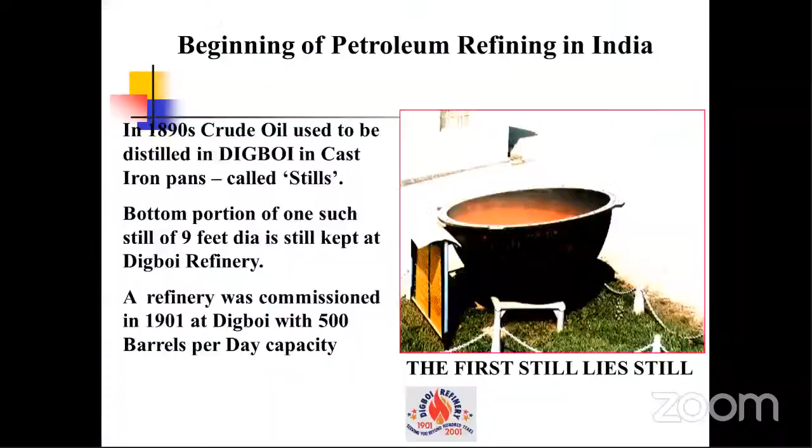Earlier in the 1890s, only separation processes were used, like the still you have seen kept in front of the Digboi refinery. Later on, conversion processes were added, and to meet environmental requirements, several finishing processes have been added subsequently. So this is the process of how hydrocarbon molecules in crude, which do not meet customer requirements, can be converted into marketable products.

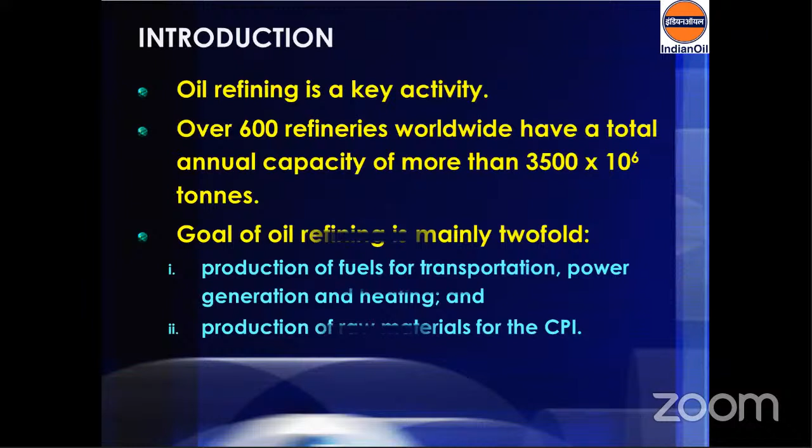Coming to the primary processes, the first step is desalting. After receiving crude in the tank, we normally give a settling time of 24 hours to settle down the water part. Then we drain the water, or if we do not drain the water, we send the crude to the desalter. After desalting, the water is separated from the crude, and the crude portion, containing minimum water, is fed to the distillation columns.

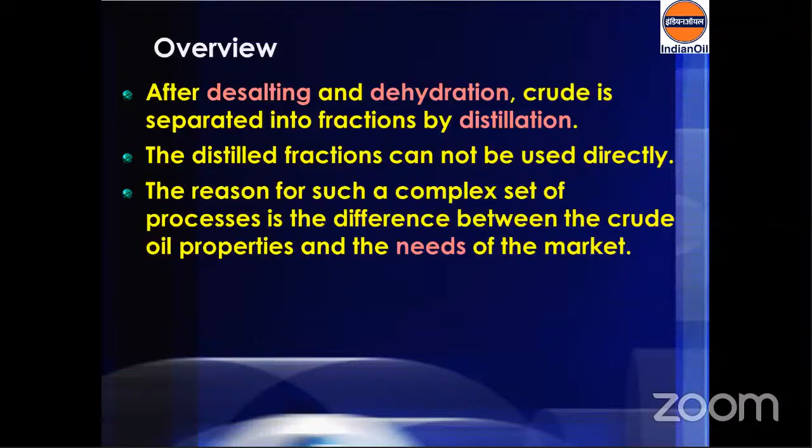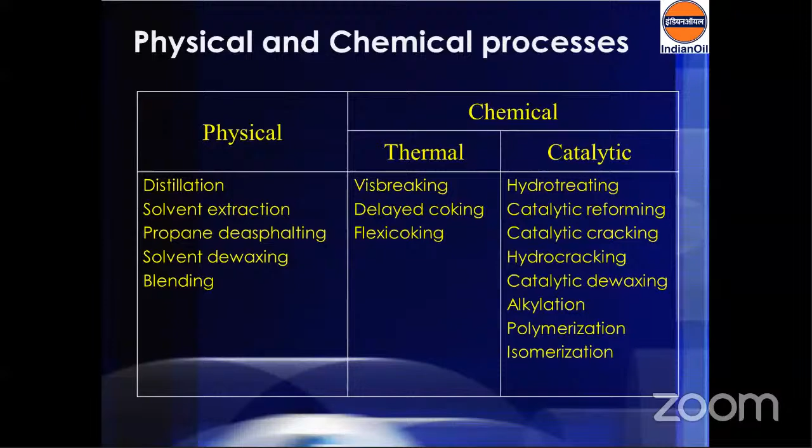Crude oil often contains water, inorganic salts, suspended solids, and water soluble trace metals. If this water is put into primary processes without segregating, it will lead to different problems. In the secondary processes, it will lead to corrosion, plugging, fouling of equipment, etc. So the method of crude desalting is important before putting the dewatered crude into the topping column or pre-fractionator - I will come to the pre-fractionator part later.

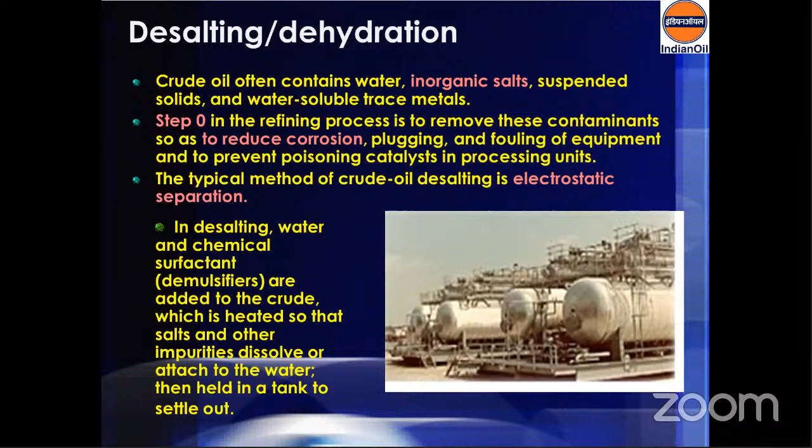What happens in desalting is basically adding surfactant materials or demulsifiers into the vessel, called the desalter, and putting some electric current into that system. By this way, water gets separated, and from the boot of the desalter, we drain out the water, which goes to the effluent treatment plant. The dewatered crude, free from water and some contaminants, is then fed into the PF column or pre-fractionator column.

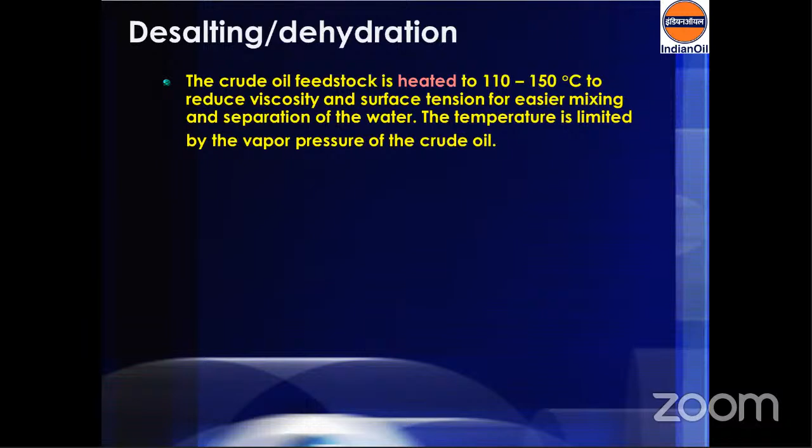Before putting that crude into the pre-fractionator column, we have furnaces to ramp up the temperature. The refining process, as seen in step 1, is a separation of crude oil into various fractions or straight run cuts. Straight run means it is directly coming out from the CDU or VDU. Cut means it is specified by a particular initial boiling point and final boiling point - cuts are the temperature ranges between which that particular cut is separated.

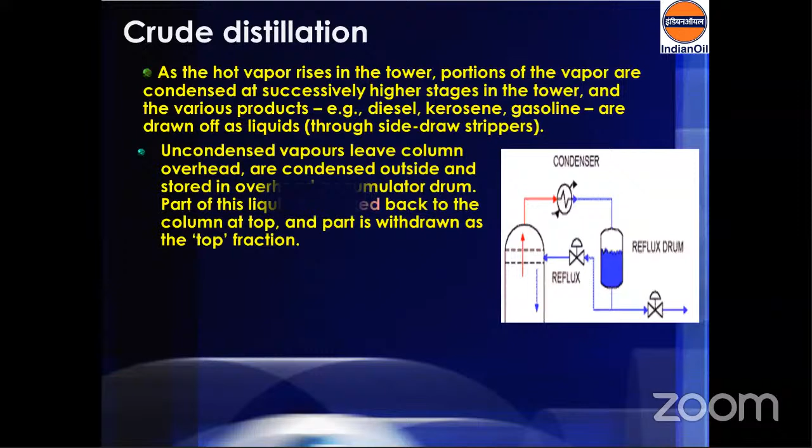The dewatered crude is then fed into the pre-topping column. The pre-topping column is nothing but an annexure to the atmospheric or crude distillation column, because some crudes contain lighter fractions that may overload the lighter section of the crude distillation unit.

In the pre-topping column or pre-fractionator, at a particular temperature of 200 degrees Celsius, we distill out two products coming from the pre-topping column - one is unstabilized naphtha and the other is the balance part. We separate unstabilized naphtha prior to feeding the crude into the CDU to reduce the load of the crude distillation unit.

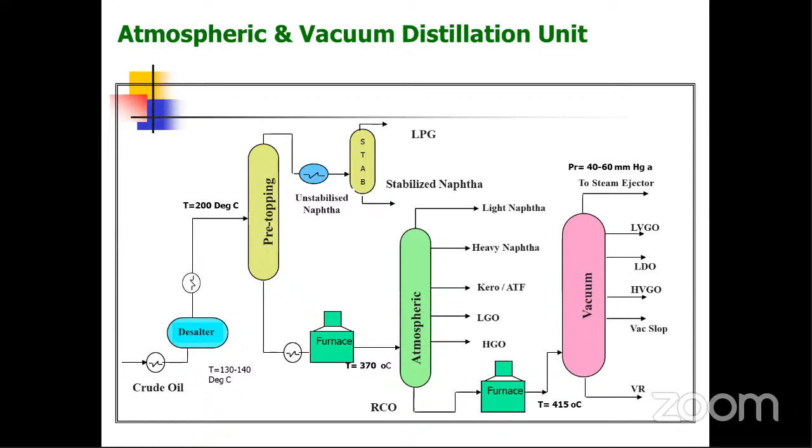So kero versus crude exchanger, HGO versus crude exchanger. With these, the temperature of the streams going to the tank is coming down, and that heat is being utilized in heating the crude before feeding it to the desalter. So there are several interconnected exchangers in between, which are basically finished product to crude oil exchangers.

Now coming to the cut range of these products, naphtha is basically C5 to 140. C5 is carbon number 5, meaning molecules which contain 5 carbon atoms. Up to LPG, C3 and C4 get separated. So what comes into naphtha is C5 plus, up to 140 degrees Celsius.

140 to 270 it is kerosene, and 140 to 240 it is ATF. Similarly, 240 to 360 or 370 is gas oil, and above 370 is reduced crude oil.

Now, what are the applications of these streams? The gas coming out from the crude distillation unit is used as refinery fuel, that is basically fuel gas, used for firing into the furnaces. LPG coming out from the CDU unit is further treated into LPG Merox, and we get domestic or industrial LPG.

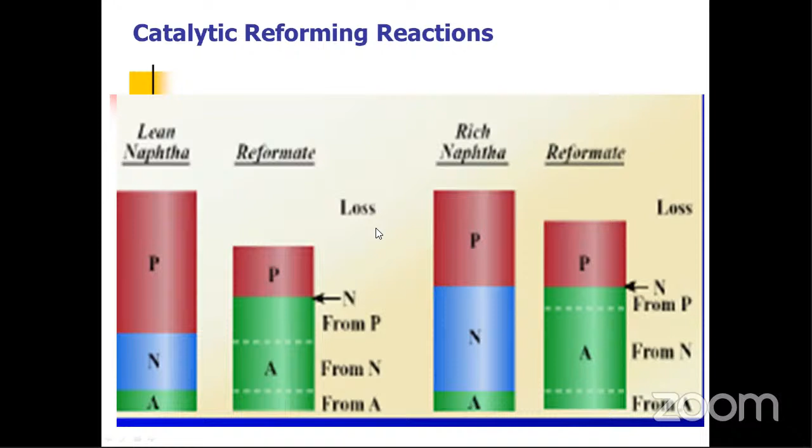After the pre-treatment of the naphtha, it is fed to a series of reactors. And in the reforming process, we get reformate as a product and hydrogen as a byproduct. LPG is also a byproduct. Part of the hydrogen is getting recycled, and the balance hydrogen is being sent to the hydrogen pool, from where various hydrotreatment facilities take their hydrogen.

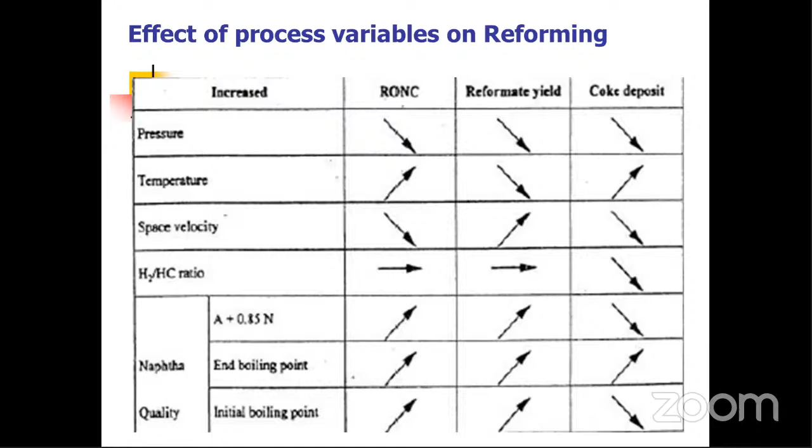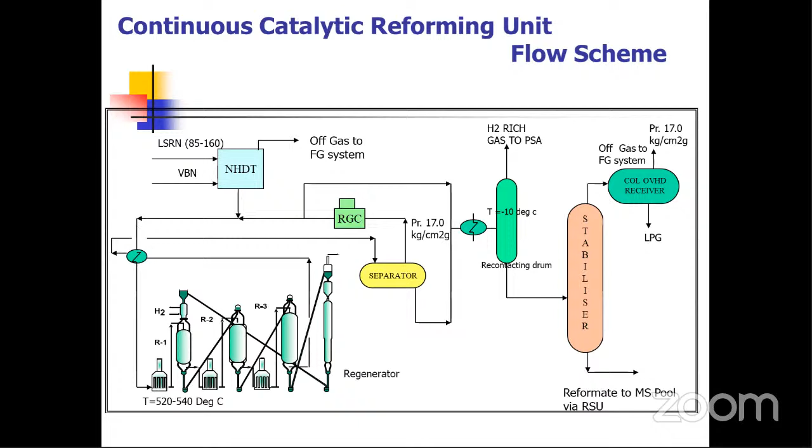Nowadays, in greenfield refineries, semi-regenerative reformers are not used, because semi-regenerative reformers have to be regenerated by taking a shutdown after 1.5 to 2 years for regeneration of the catalyst. But in a continuous catalytic reforming unit, there is a regenerator which removes the coke from the catalyst, and the catalyst is continuously recycled in reactors. So this kind of unit does not require shutdowns every 1.5 or 2 years, and can run continuously. Preferably, continuous catalytic reforming is more profitable, but in old refineries there are still semi-regenerative kind of units.

Now coming to diesel desulfurization. Diesel desulfurization can use LGO or LAGO and vacuum gas oil as feed. There are various other feeds from secondary processes also, like FCC LCO, or FCC heavy cycle naphtha, which I will come to later. Those can also be fed into DHDS.

So it's a high pressure process. DHDT is a more high pressure process than DHDS. DHDS operates at 40 to 50 kg per centimeter square.

So after the reaction, the sulfur part gets converted into H2S and goes to the absorber, and from there it is sent to the sulfur recovery unit. The diesel part, which is desulfurized, gets stripped off, while naphtha is separated from that, and desulfurized diesel comes out from the bottom of the stripper.

The need for separating the wild naphtha from this stripper is basically on account of low cetane number, because diesel has a specification of 51 cetane number, but the naphtha will have less cetane number, to the tune of 35 to 40. So basically, if we do not recover this naphtha from here, it will be entrapped into the diesel and will lower its cetane number. So we have to add external chemicals like cetane improver, which are costlier, to bring the cetane number to the tune of 51.

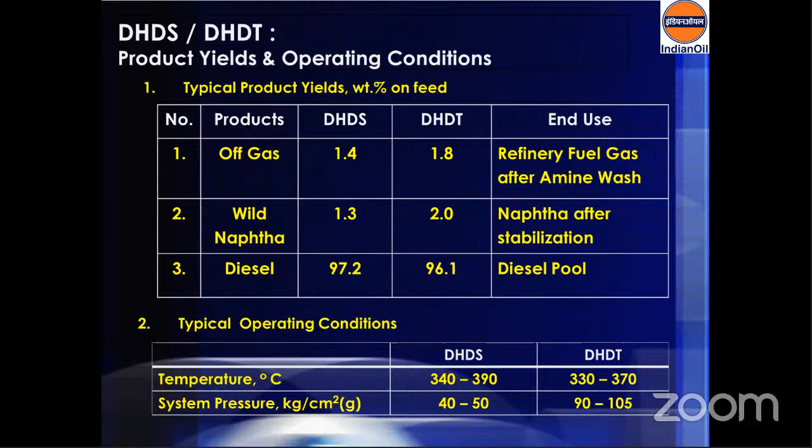Now coming to the vacuum distillation products, one is VGO, vacuum gas oil. SO, LO, IO are also part of vacuum gas oil. We normally do not separate those unless it is required for further secondary processes or lube oil products.

This SO, LO, IO are separated from the vacuum gas oil in lube refineries. But in non-lube refineries, there is no need of segregation of SO, LO, IO. VGO will come out as one stream, HVGO as a separate stream, and some amount of vacuum slop is recovered, along with vacuum residue.

So in non-lube refineries and in modern lube refineries, there are 4 cuts: vacuum gas oil, HVGO, vacuum slop, and vacuum residue. But in refineries producing lubes by conventional processes, there will be 5-6 cuts like vacuum gas oil, spindle oil, light oil, inter oil, heavy vacuum gas oil, vacuum slop, and vacuum residue. So this depends upon the finished product we are going to produce.

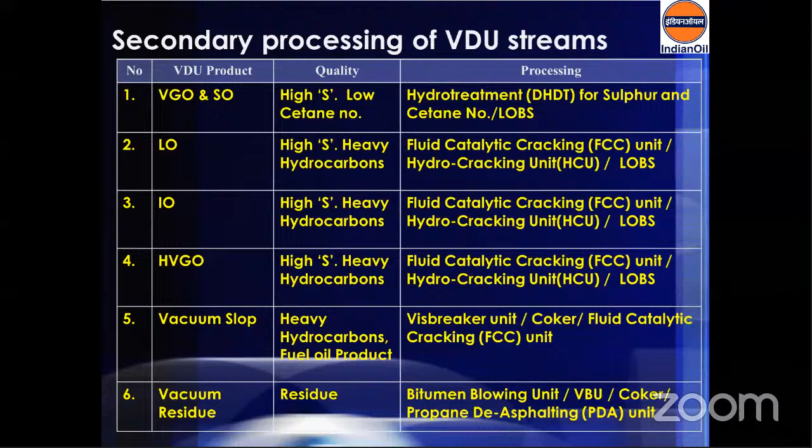Coming to lube-based oil processing. Earlier, lube-based oil processing was guided by crude selection or multi-step manufacturing processes. But in modern refineries, lube production depends to some extent on crude selection, but there is no multi-step manufacturing process. In modern refineries, there are catalytic processes for dewaxing, but in older refineries, there are conventional processes of solvent dewaxing, solvent extraction, and hydrofinishing.

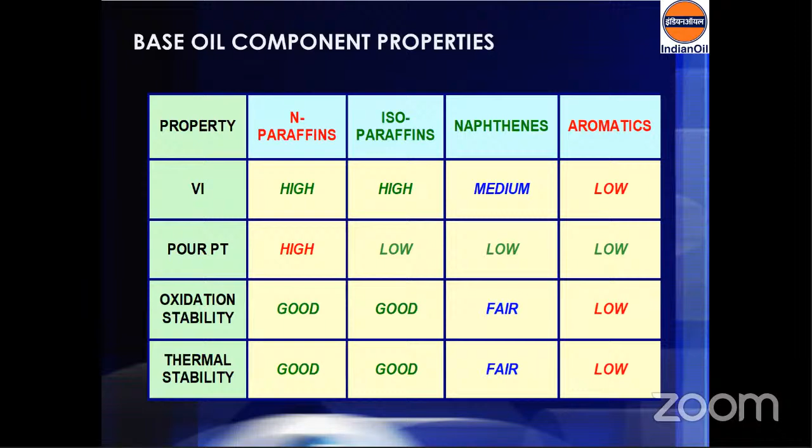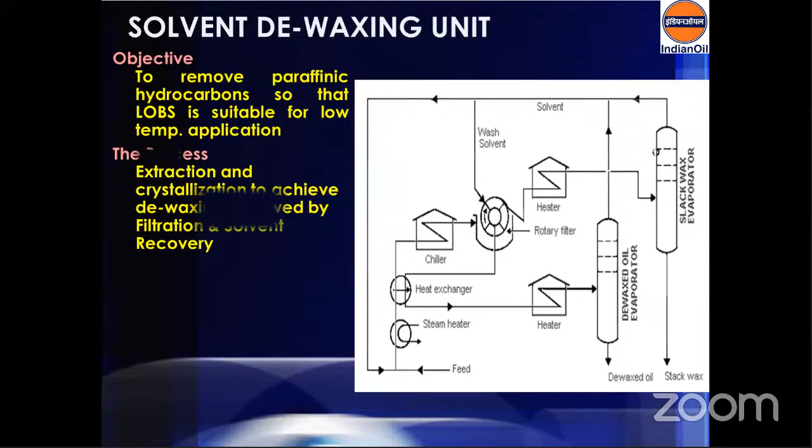So basically, I will not go deep inside the base oil. If I have time, I will tell about base oil and base oil properties. I will go to the secondary treatment units. I am skipping these things because they are not prerequisites of today's discussion.

Now coming to the fluidized catalytic cracking unit. VGO, which comes out from the vacuum distillation unit, requires further treatment. In the earlier session, day before yesterday, I told there are two dispositions for this vacuum gas oil: one is fluidized catalytic cracking unit, the other is hydrocracker. What FCC does is convert the vacuum gas oil to valuable distillates like LPG, gasoline, diesel, etc. by catalytic cracking process in fluidized bed.

Feed varies from refinery to refinery because some refineries have FCC, some have RFCC, which is resid FCC, some have VGO FCC, and the rest have Petro FCC or INDMAX. So in FCC, VGO is the feed. In RFCC, VGO along with RCO and VR is the feed. And in INDMAX, hydrotreated VGO is the feed. Nowadays, after incorporation of the hydrocracker unit, the unconverted part, the hydrocracker bottom, is also fed to FCC.

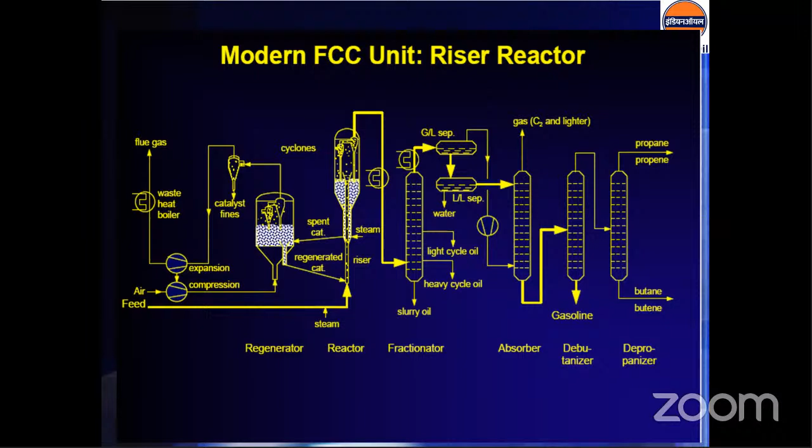So I will come to the comparison between different types of FCC. One is VGO FCC, it treats VGO as feed. One is resid FCC, it takes VGO, VR, and RCO as feed. One is INMAX, which takes VGO as feed or VGO plus VR as feed, depending upon configuration. And one is Petro FCC, which is the modern version of INMAX.

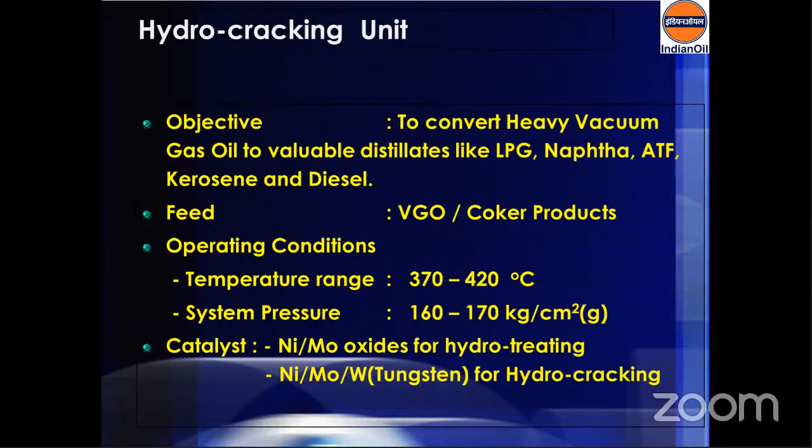So basically, the hydrocracker unit operates at a higher temperature of 370 to 420, at a system pressure of 160 to 170, and the catalysts are mainly NiMo based.

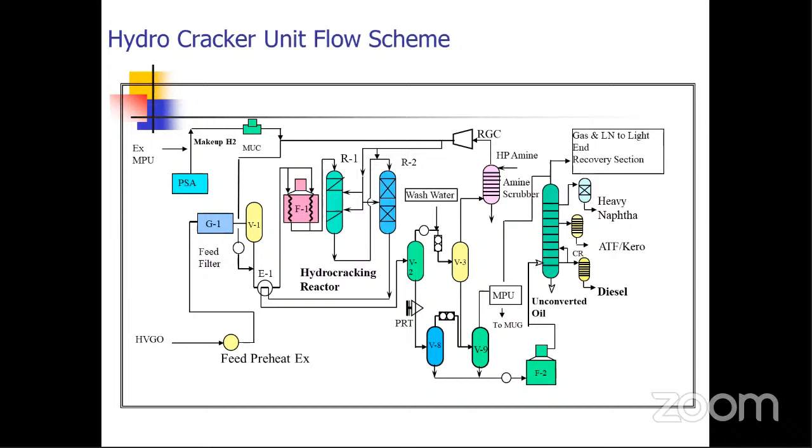Now, the last one is the delayed coking process. Refineries which are older do not have the bottom of the barrel upgradation facility, meaning the black oil which comes out from the bottom of the vacuum distillation unit, which is VR or SR, short residue or vacuum residue, is normally used in conventional refineries for production of furnace oil or bitumen.

The modern refineries have a delayed coking process, which takes the vacuum residue as feed and converts it into LPG, light coker gas oil, heavy coker gas oil, and petroleum coke. So basically, in the delayed coking process, we get more distillates compared to conventional refineries where VR is used in the FO or bitumen pool. None of the products coming out from the delayed coking process is a finished product, and each intermediate product generated in the DCU is further treated to get the desired product.

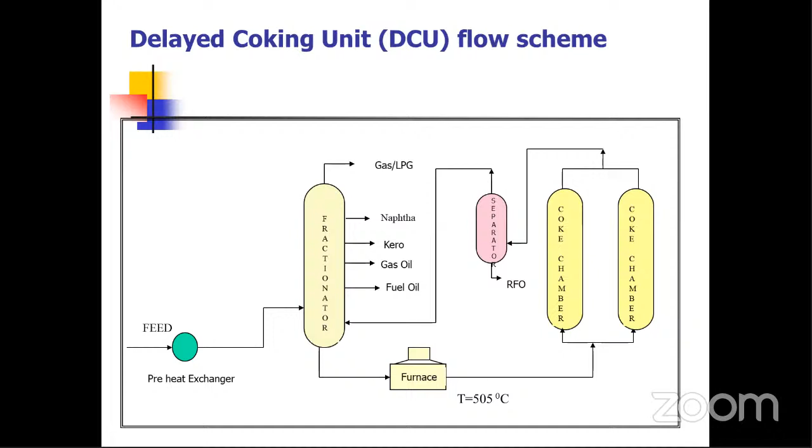So this is the schematic of a simple delayed coker unit where the feed is vacuum residue and the products are gas oil, naphtha, kero, and fuel oil. This fuel oil is also heavy coker gas oil, which we can further treat, along with petroleum coke.

A delayed coker unit does not produce any finished product, and all the intermediate products like LPG, which has high mercaptans and high unsaturates, are further treated in Merox or caustic wash. Naphtha, which is low octane and high olefin, is further treated in naphtha hydrotreater or DHDT. Kerosene, which has high unsaturates, or light coker gas oil, is sent to DHDT. Gas oil, which is heavy coker gas oil with a low cetane number, is sent to mild hydrocracker or FCC.

The petroleum coke is being sold as pet coke. In modern refineries, they have facilities to further upgrade the coke, which is called the coke gasification process. So by gasification of coke, we can get further distillates.

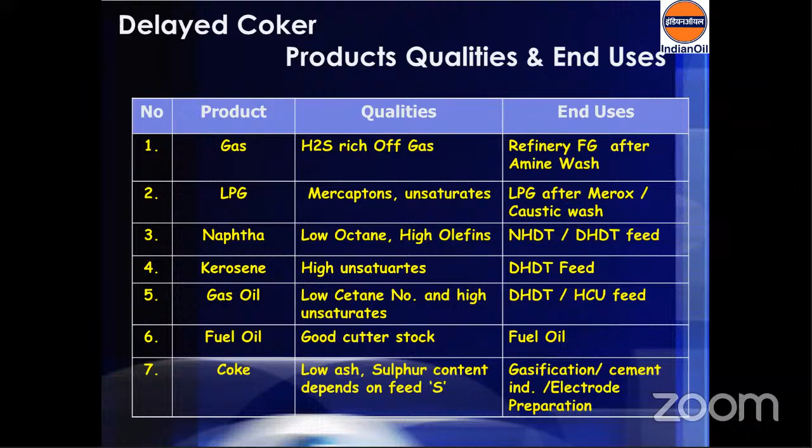Some of the refineries in India have coke gasification units, whereas most do not. Those without coke gasification units face problems in disposal of coke, because based on environmental norms, firing of coke has to be done in the furnace in such a way that the emissions meet the stringent environmental norms of stack emission.

So in today's session, what we have covered mainly is primary processes like CDU, VDU, secondary processes like CRU, CCRU, contaminant removal processes like DHDS, DHDT, distillate upgradation processes like FCC and hydrocracker, and vacuum residue upgradation process like the delayed coker unit. That's all, I think.

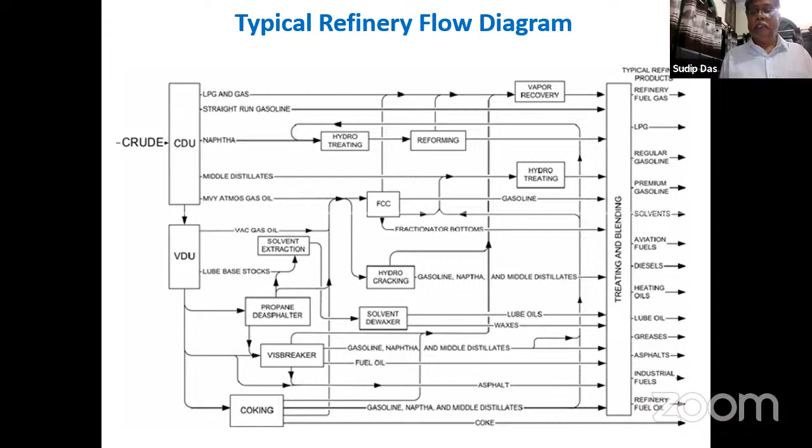Now, if you think of global liquid consumption of global fuel, crude oil spot price averaged $75 per barrel in July this year, up $5 per barrel from June, and up $25 per barrel from the end of 2020. This price has been rising this year as a result of a steady drawdown of global oil inventories, which averaged 1.8 million barrels per day during the first half of 2021, and remained as much as 1.4 million barrels per day in July.

We expect the price will remain nearly the same for the remainder of this year, and expect slight growth or slight decline next year, around $65 to $66 per barrel.

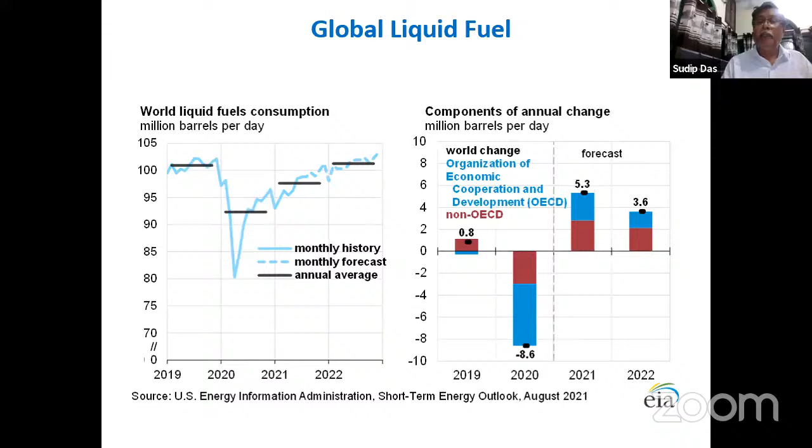It was estimated that around 98.8 million barrels per day of petroleum and liquid fuels were consumed globally in July, an increase of 6 million barrels per day with respect to 2020, but 3.4 million less than July 2019, and this is due to the COVID pandemic situation.

In India, oil demand is expected to grow by 480,000 barrels per day in 2021 after a sharp contraction last year, reflecting growth of the economic condition of India. Apart from being channeled into manufacturing, agriculture, and industrial sectors, analysts say up to 85% of Indian oil demand comes from the road sector, given the country's massive transportation network of interstate buses, flights, and trains. So demand for liquid fuel for the road sector, that is petroleum, motor vehicle, truck fuel, gasoline and diesel, is increasing.

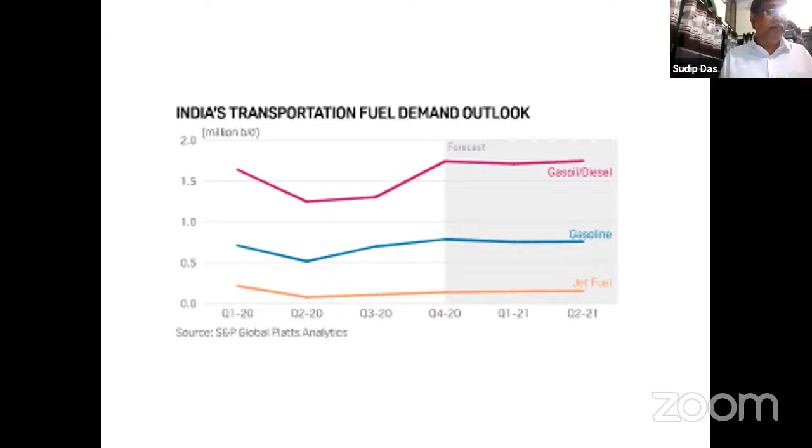The role of liquidity and overall dollar weakness is also an important parameter for cost analysis of oil prices. We have a large number of refineries, and one of the biggest is Jamnagar by Reliance Industries, built at 33 million metric tons per annum in 1999 and expanded to 35.2 million metric tons per annum in 2008. Overall, Indian refinery capacity is around 249.9 million metric tons per annum, and crude oil processed was 254.4 million metric tons per annum in 2019-20 and 221.8 million metric tons in 2021.

Due to the pandemic situation, the production rate is slightly lower, and India also exports large amounts of petrol and diesel to other countries. MS production in 2019-20 was 38.6 million metric tons, and consumption was around 30 million metric tons. In 2021, production was 35.8 million metric tons, and consumption was 28 million metric tons.

In terms of cost, the average crude price in 2019-20 was $60.74 per barrel, whereas in 2021 it was $44.82 per barrel, and in May 2021 it was $66.95 per barrel. For petrol, in 2019-20 it was 66.94, in 2021 it was 47.68, and then 74.42. Similarly, diesel price is also slightly less than the crude oil and petroleum oil price.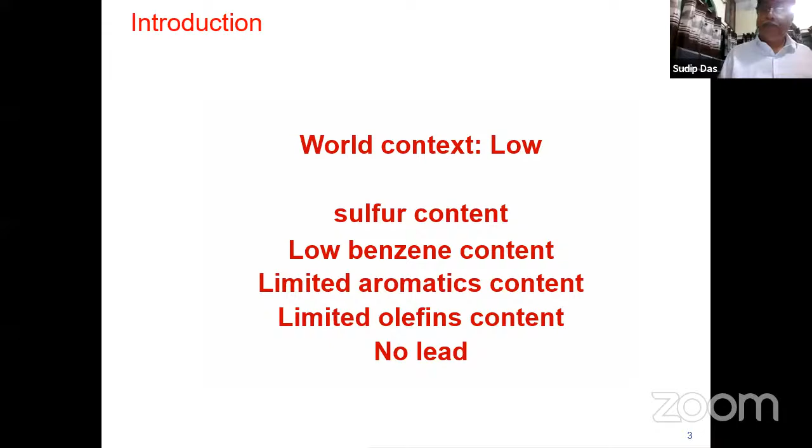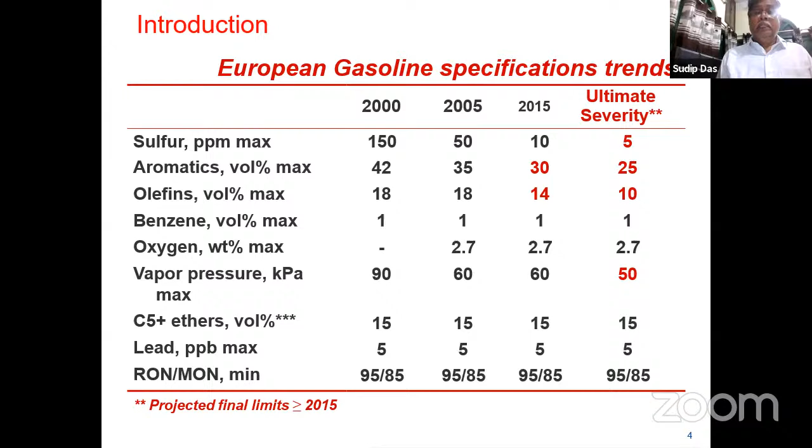Depending on requirements for implementing stringent regulations, particularly Bharat 6, a number of pre-treatment steps are also necessary for this operation. This is the European gasoline specification: 2000, 2005, and 2015, and ultimate severity is not yet implemented. In Indian specification gasoline, Bharat 3, Bharat 4, and Bharat 6, sulfur should be less than 10 ppm, and in Bharat 6, IOC and all refineries are trying to keep sulfur content in gasoline less than 9 ppm. Aromatic volume maximum is 35%, olefin 21%, benzene 1%, oxygen 2.7%, vapor pressure 60 kPa, and RON/MON of 98, 91, 81 in Bharat 6.

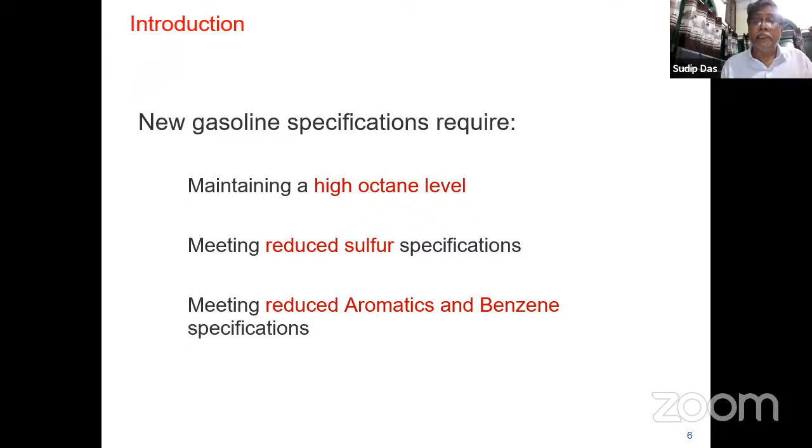So new gasoline specifications require a high octane level, meeting reduced sulfur specifications, and meeting reduced aromatic and benzene specifications.

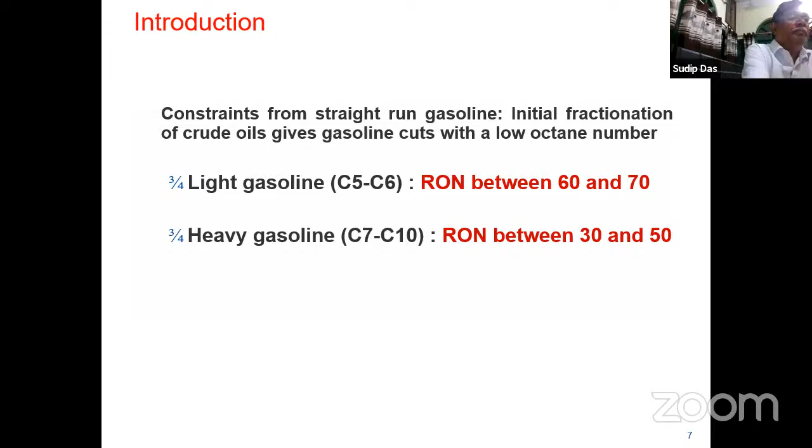Constraints from straight run gasoline, that is the initial fraction of crude oil, give a gasoline cut with a low octane number. Three-fourths is light gasoline, containing C5 to C6 components, with RON varying between 60 to 70. The remaining heavy gasoline, C7 to C10 components, has RON varying from 30 to 50, which is a very low RON number.

RON or MON, the octane number, can be increased by chemical transformation. Light gasoline can be isomerized, so normal paraffins can be isomerized to isoparaffins. For example, normal hexane has RON 24.8, while 2,2-dimethyl butane has RON 91.8, showing an increase in octane number. For heavy gasoline, the catalytic reforming process converts normal paraffins and naphthenes to aromatics; for example, cyclohexane has RON 83, whereas benzene has RON 108, showing this conversion is possible.

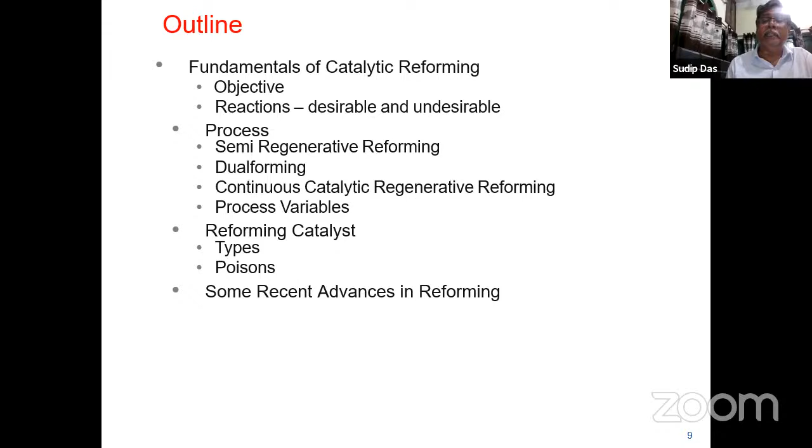On that background, we will cover the catalytic reforming process fundamentals: the objective, the reactions (some desirable, some undesirable), the process types - semi-regenerative, dualforming, continuous catalyst regeneration - the process variables, the reforming catalyst, poisons, and some recent advances in reforming operations used in refineries. So what is the purpose of reforming?

The purpose of the reforming unit in the refinery is to produce high octane reformate, which is the main component of motor fuel, aviation gasoline blending, or aromatic rich feedstock. We also get hydrogen rich gases. Due to the nature of the reaction, the reforming process also produces LPG and fuel gases.

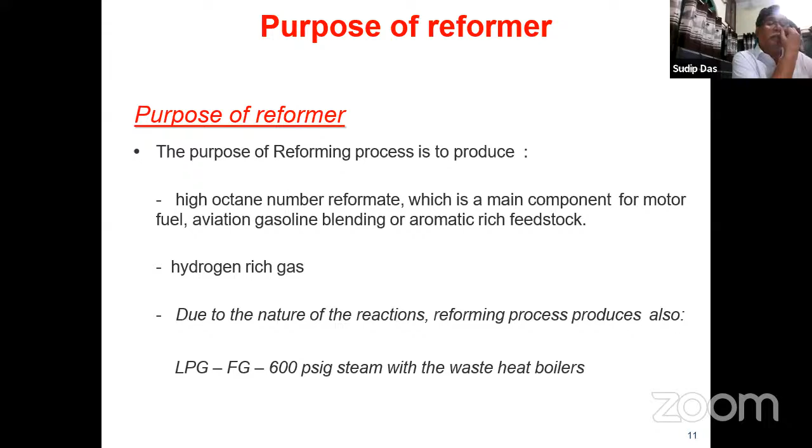The purpose of reforming is that the reforming feed is either low quality straight run naphtha or cracked naphtha, generally mixed with straight run naphtha. Reforming feed must undergo pre-treatment, which is necessary due to the presence of contaminants in all cases and the specific characteristics of the cracked naphtha. A naphtha pre-treatment unit is always necessary for the feedstock.

Typical feedstock and product analysis: paraffin, olefin, naphthene, aromatic (PONA) analysis. Feed paraffin content is 45 to 55 weight percent, product content is around 30 to 50 percent. Olefin is 0 to 2 percent in feed, product will be 0. Naphthene is 30 to 40 percent in feed, product 5 to 10 percent. Aromatic is 5 to 10 percent in feed, and product is 45 to 60 percent.

Aromatics are important ingredients in the reformate product, responsible for increasing the octane number. Also, the paraffins, specifically normal paraffins which are converted to isoparaffins, are responsible for increasing the octane number of the product.

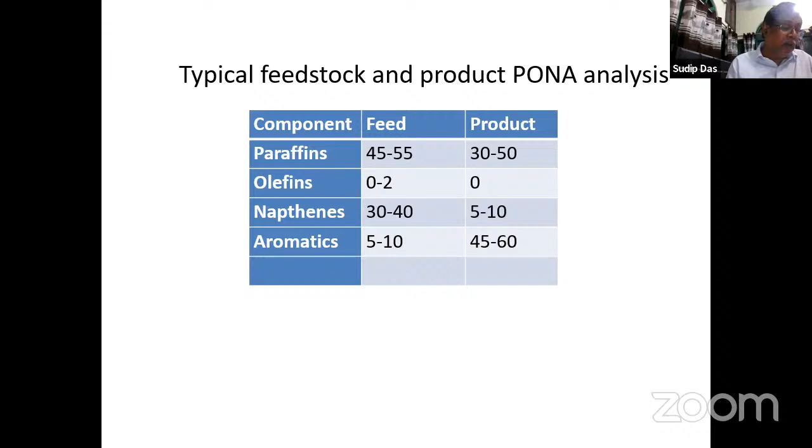Types of gasoline used: one is LSR gasoline, which is C5 to 82 degrees centigrade gasoline, largely composed of lower molecular weight paraffins. Another is boiling range above that, up to around 204 degrees centigrade. So feed must be composed of C5 gasoline, LSR gasoline, up to 204 degrees centigrade fraction of the gasoline.

If we feed lower molecular weight components into the reforming unit, it will produce butane and other lower molecular weight gaseous components, so it is not economical in the process. Also, hydrocarbons above the boiling range of 204 degrees centigrade are easily hydrocracked at the operating conditions and cause excessive carbon deposition on the catalytic bed in the reactor.

Two types of reactions are generally involved in increasing the octane number of the product. One is the desirable reaction, which leads to a higher octane number and high purity hydrogen production - these reactions should be promoted. There are also adverse reactions, which lead to a decrease in octane number and hydrogen, and these must be minimized. So optimization of parameters is important; we try to maximize the desirable reactions and minimize the undesirable ones.

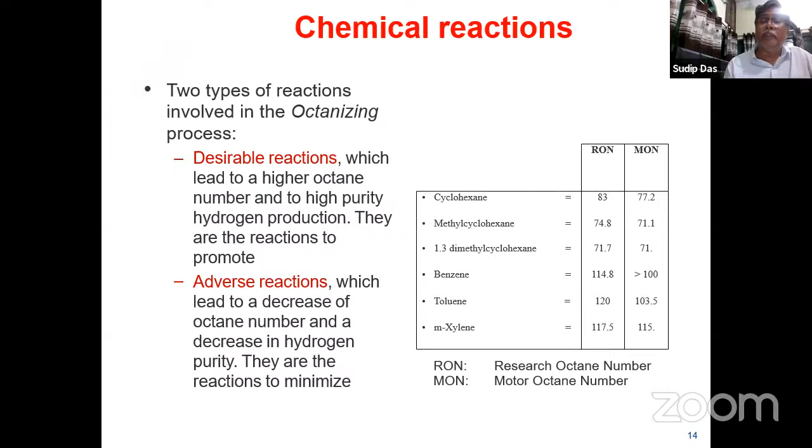Desirable reactions occur with hydrogen production. Here, a series of complex chemical reactions occurs - some are desirable and some are undesirable. Reaction conditions have to be chosen that favor the desirable reactions and inhibit the undesirable ones.

Desirable reactions in the catalytic reforming unit lead to the formation of aromatics and isoparaffins. Paraffins are isomerized and to some extent converted to naphthenes, which should then be converted to aromatics. Olefins are saturated in the presence of hydrogen, since once naphthenes convert to aromatics, hydrogen is generated. So all olefinic compounds present in the feed must be saturated under that condition. Naphthenes are converted to aromatics, while aromatics already in the feed are generally not reacted and remain as such.

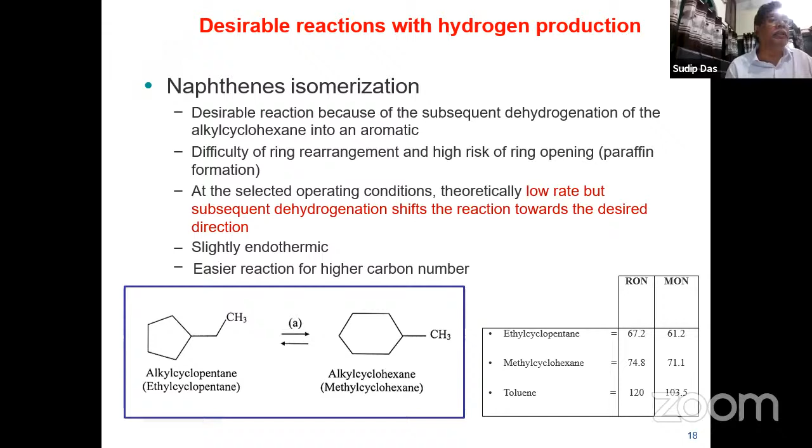Undesirable reaction is hydrocracking. Hydrocracking affects either paraffin or olefin compounds, promotes both acidic and metallic function of the catalyst, and is favored by high temperature and high pressure. This is a highly exothermic reaction, so there is a possibility of runaway reaction if we do not maintain the proper reaction condition or cannot extract the heat of reaction. At a selected operating condition, hydrocracking reaction will not be complete but is limited by kinetics, which is an advantage of the process.

What is the consequence of cracking? It decreases paraffin, increases aromatic proportion, increases octane number, and decreases hydrogen production because cracking reaction consumes hydrogen. When the molecule is cracked, one double bond compound is produced. This double bond compound, in presence of hydrogen, takes hydrogen to become saturated, so hydrogen production decreases. It also increases the yield of light end products, that is low molecular weight paraffins, mainly gaseous paraffins in the LPG range, so light end production is more.

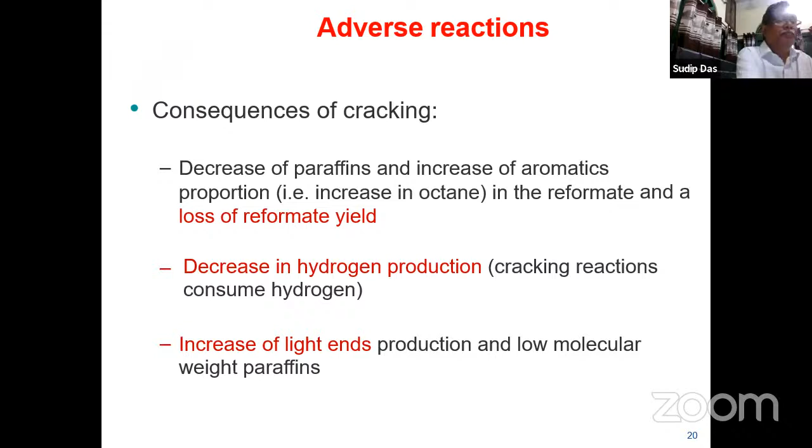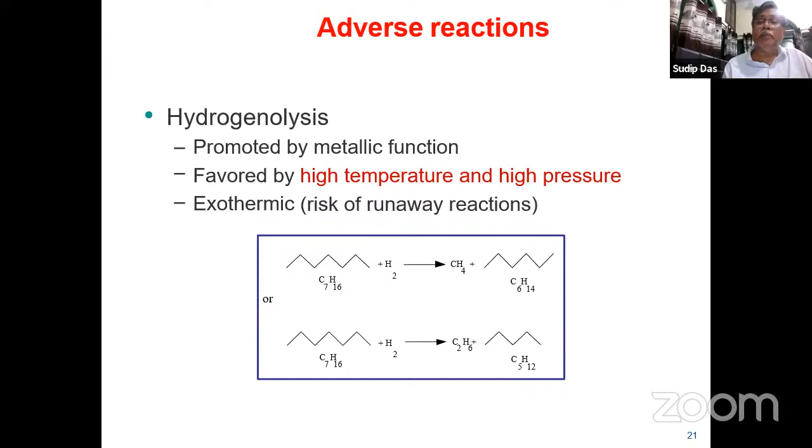Another reaction is hydrogenolysis, promoted by the metal function of the catalyst, favored at high temperature and high pressure. This is exothermic, so runaway reaction is possible. It also produces methane or ethane type molecules, that is breaking of the chain.

Hydrodealkylation is another adverse reaction, breaking of the branch present on the aromatic ring, promoted by the metallic function of the catalyst, favored by high temperature and high pressure. It consumes hydrogen and also produces methane, ethane, propane, or butane depending upon the length of the side chain. With selected operating condition and selected catalyst, the reaction is not very significant, but proper selection of operating condition and catalyst is necessary.

Another reaction is alkylation, the addition of olefinic molecules on the aromatic ring, promoted by the metallic function of the catalyst, leading to heavier molecular weight, which may increase the end point of the product. There is also a tendency to promote coke, which is deposited on the catalyst, decreasing its activity subsequently. So this type of reaction must be avoided.

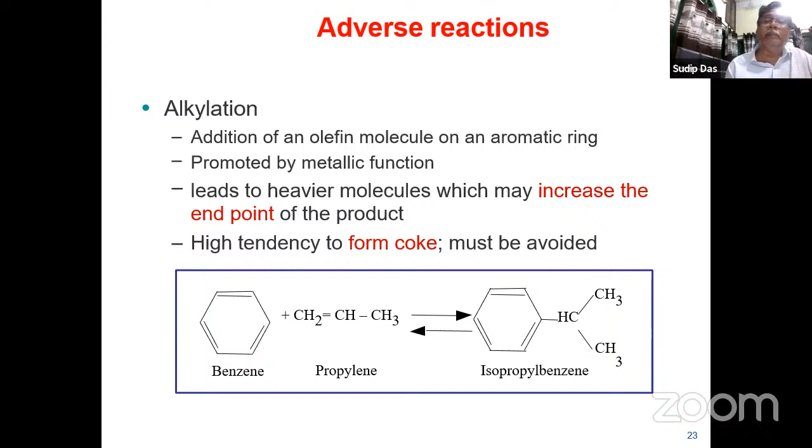Transalkylation, that is alkyl disproportionation, involves dismutation of two alkyl groups where two toluene rings produce a benzene and xylene. This type of reaction is also promoted by the metallic function, but is favored only at very severe conditions of temperature and pressure. By selecting a proper operating condition and catalyst, this reaction is very negligible in ideal conditions.

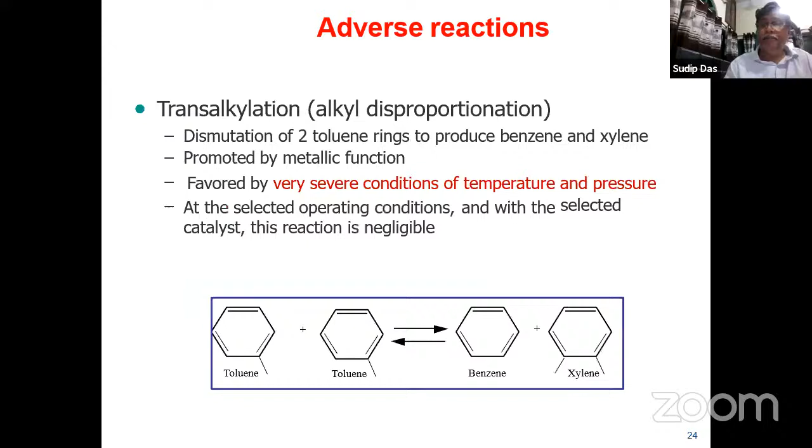The next is coke formation, also a very adverse reaction resulting from a complex group of reactions. The detailed mechanism of coke formation is not fully known, but heavy unsaturated products like polynuclear aromatics and heavy olefins, with traces of diolefin present in the feed or produced during the reaction, are thought to be involved. Coke deposited reduces the active contact area and reduces catalytic activity drastically. It favors high temperature and low pressure. In operating conditions, continuous regeneration is necessary to maintain a low level of coke on the catalytic surface.

If you think the conversion, naphthene to aromatic conversion is more or less 98%. Methyl cyclopentane produced benzene, cyclohexane produced benzene. Dimethyl cyclopentane produced toluene, dimethyl cyclohexane produced xylene. Cycloheptane produced toluene, methyl cycloheptane produced xylene.

If you do the paraffin to aromatic conversion, 1 mole of P6 paraffin, that is 6 carbon paraffin, yielded 0.5 mole of aromatic 6-membered aromatic ring, that is benzene. 1 mole of P7 yields 0.1 mole of A7. 1 mole of P8 yields 0.25 mole of A8. 1 mole of P9 yields 0.45 mole of A9. 1 mole of P10 yields 0.45 moles of A10, aromatic 10.

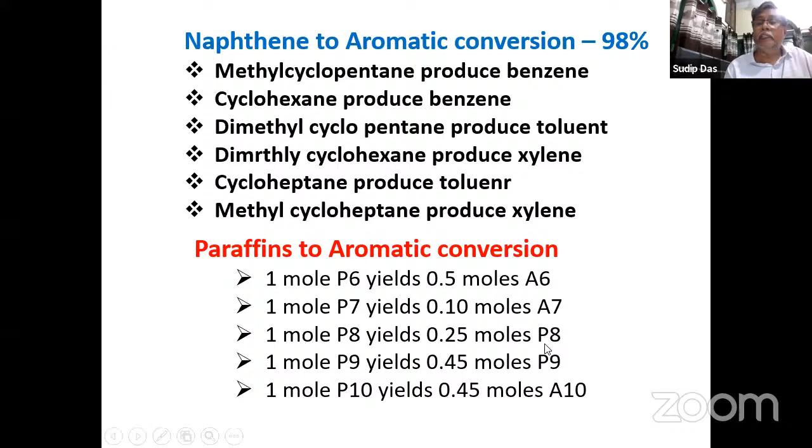All these reactions occur in series and parallel to each other, producing a complicated reaction scheme. In an effort to simplify the scheme according to the reaction rate, the main reaction takes place in the following order: the first reactor mainly does dehydrogenation and isomerization. In the second or third reactor, dehydrogenation, isomerization, cracking, and dehydrocyclization take place. In the fourth reactor, cracking and dehydrocyclization reactions generally take place.

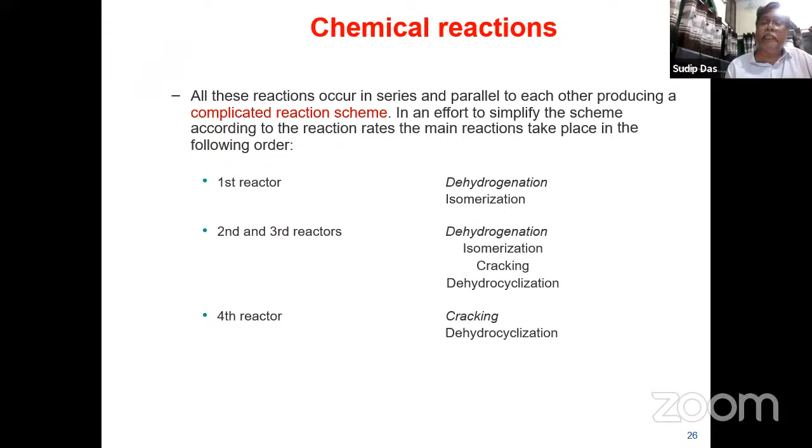So the simple scheme is: the first reactor is responsible for dehydrogenation and isomerization reaction. The second and third reactors handle dehydrogenation, isomerization, cracking, and dehydrocyclization. The fourth reactor is responsible for cracking and dehydrocyclization reaction.

So naphtha catalytic reforming reaction includes dehydrogenation, dehydrocyclization, isomerization, and hydrocracking as main reactions, which are performed both by the metallic and acidic part of the catalyst.

For dehydrogenation reaction, the metallic function of the catalyst is important. For dehydrocyclization, the metallic plus acidic group, the acidic site, is important. For isomerization, both metallic and acidic functions are important. For hydrogenolysis, the metallic function is important. And for hydrocracking, metallic plus acidic function is important.

Basically, this is a highly endothermic transformation, and the rate of reaction also varies very widely. So the overall amount of catalyst needed for the transformation is distributed unequally among the several adiabatic reactors in series, with intermediary heaters provided to supply the required heat energy.

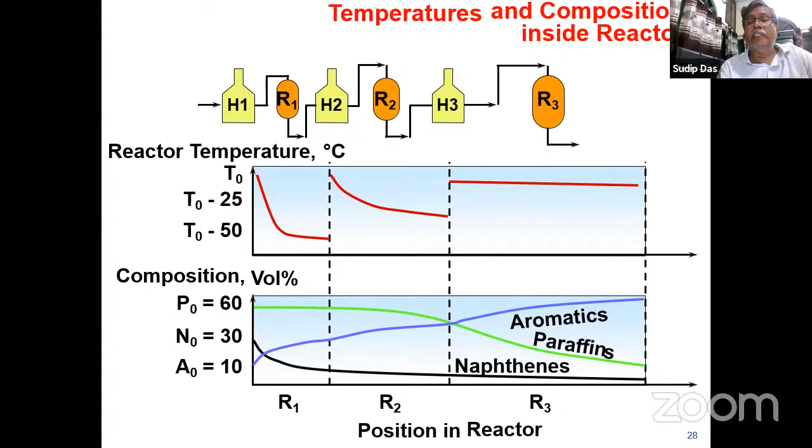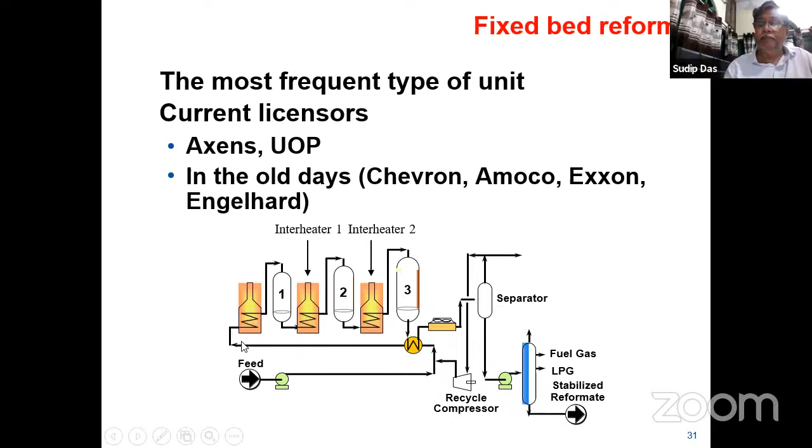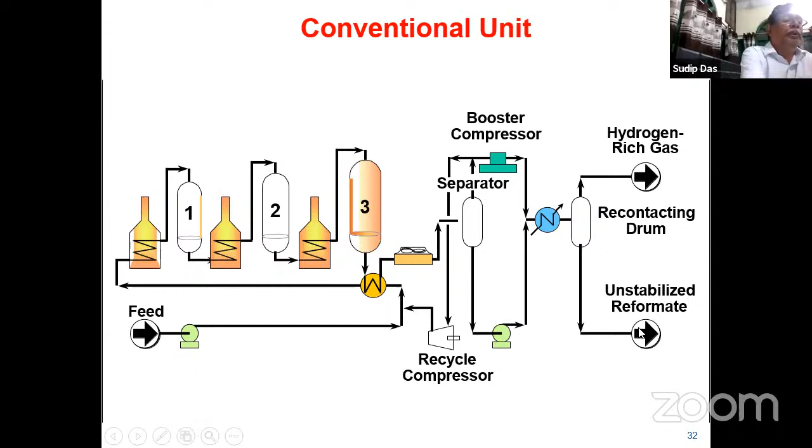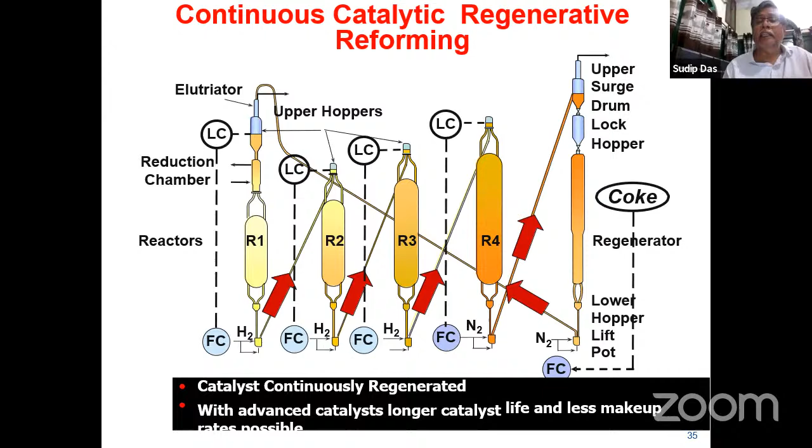This is also a continuous catalytic regenerative reforming unit. It is also a continuous catalytic reforming unit. Different licensors, different types of systems can be used. See, this volume is lower, then slightly increases, and maximum is this, 10, 20, and in that order catalyst is distributed.

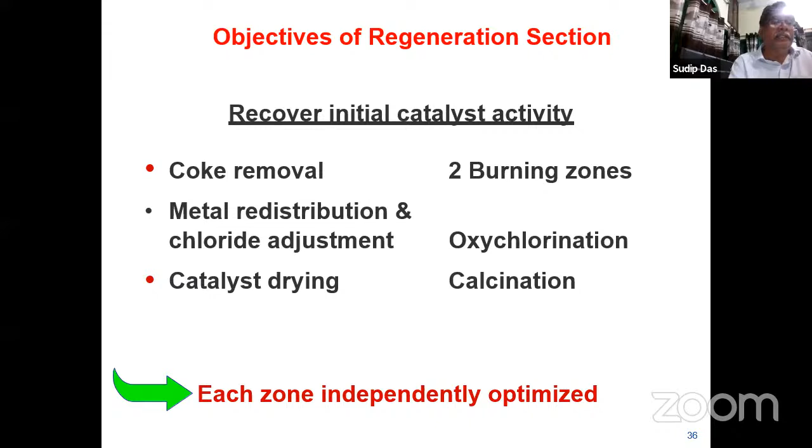The objective of the regeneration system is to remove the catalyst so that it can be regenerated. Metal redistribution and chloride adjustment should be required. Catalyst drying is also required. So coke removal is the burning zone, where coke is converted to carbon dioxide. Metal redistribution chlorine zone, the oxychlorination zone should be there, and catalyst drying as calcination zone should be there. Each zone is independent, and each zone should be optimized according to the process condition and input catalyst condition.

In the oxychlorination unit also, oxygen, temperature and moisture should be properly controlled. And the optimum platinum dispersion should be required so that in the calcining condition that is not hampered. One has to look after this process also.

This is the catalyst regenerator: primary burning, finishing burning, oxychlorination unit, chloriding agent added, and calcination unit, and then we will get the regenerated catalyst from the unit.

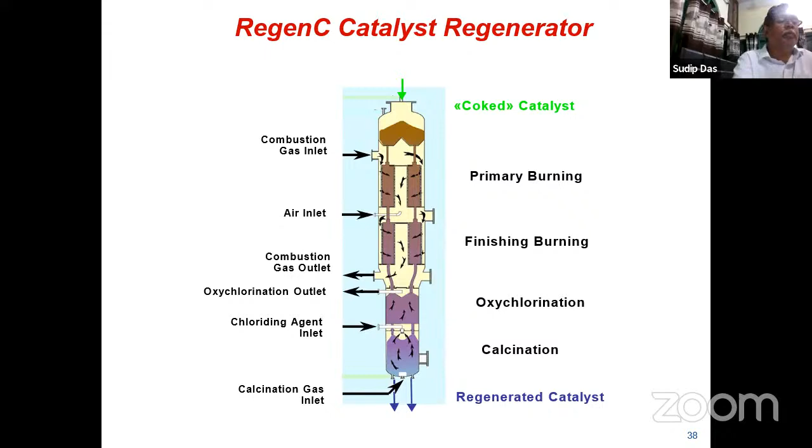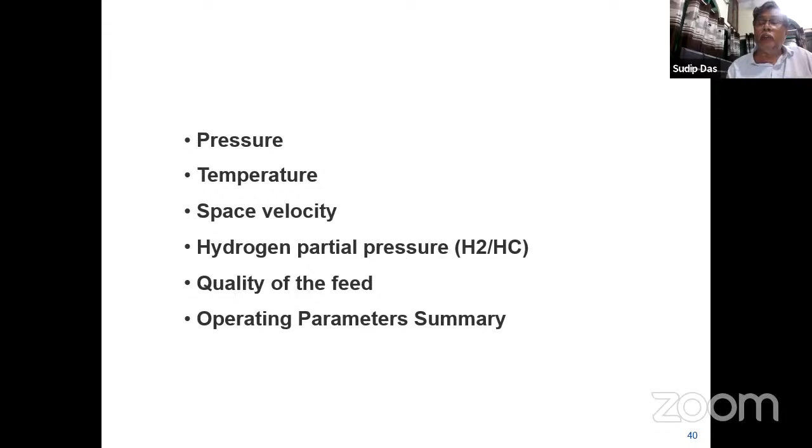Now, what are the process variables? Process variables are pressure, temperature, space velocity, hydrogen partial pressure, quality of feed, and operating parameters. What is the summary of the operating parameters? Process variables are pressure, temperature, space velocity, hydrogen partial pressure, hydrogen to hydrocarbon ratio, quality of the feed, and operating parameters, in tabular form.

Each of them can be fixed by the operator within the operating range of the equipment and independently from each other. One set of independent variables for the same feed characteristics gives only one performance of the unit, that is one set of values: for product yield, for product quality that is octane, and for catalyst stability, that is coke make, how much coke is made, and product stability.

First is pressure. Pressure is a basic variable because it inherently affects the rate of reaction. Low pressure enhances hydrogen production because if you think of one paraffinic molecule, one naphthenic molecule gives one aromatic molecule plus 3 hydrogen. So low pressure enhances the hydrogen production reaction, that is dehydrogenation, dehydrocyclization, and also the coking reaction.

And cracking rate is also reduced as pressure is reduced. So at lower pressure, higher yield of reformate is possible, and hydrogen for a given octane number, with high coking rate, but this possibility of a high coking rate is compensated by continuous regeneration of the unit.

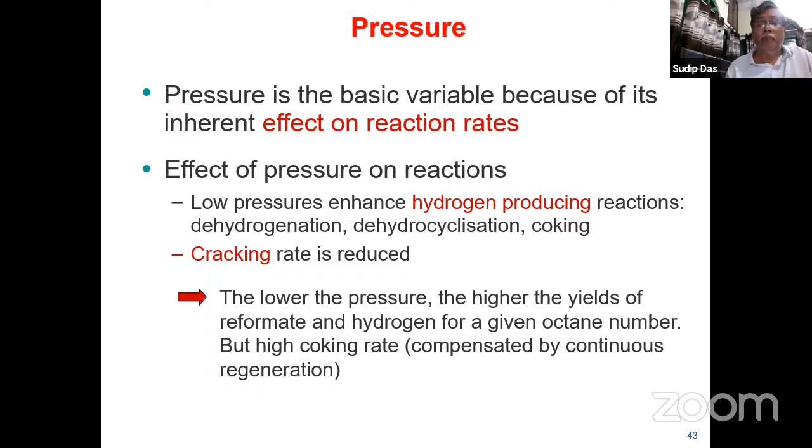Average catalyst pressure used refers to last reactor inlet pressure. It is a highly generalized statement. During transient conditions, that is start-up, shutdown, or upset condition, it is recommended to increase the pressure to lower the coke formation, so that the catalyst can be kept intact.

But the limits of operator action: the pressure rise is limited by equipment design pressure. Lower pressure is limited by recycle compressor design power and intake volume. That part is important.

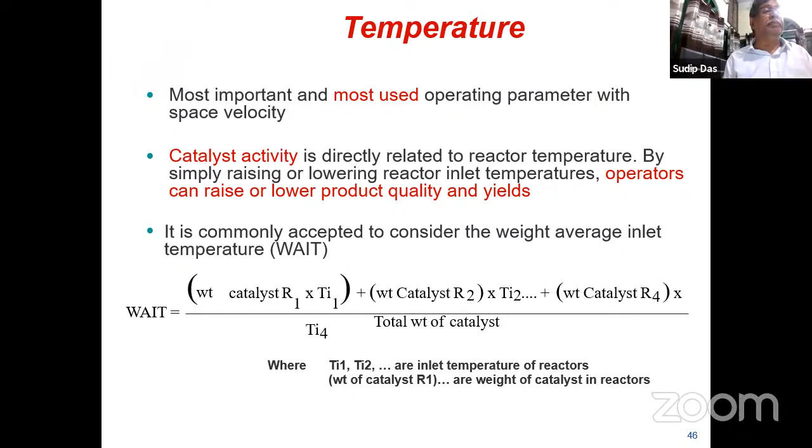Next is temperature, the most important and most used operating parameter, along with space velocity. Catalyst activity is directly related to the reactor temperature. By raising or lowering the reactor inlet temperature, the operator can raise or lower the product quality and yield. The commonly accepted weight average inlet temperature can be calculated by this formula.

An increase of temperature has a major effect: it increases the octane number, decreases the yield of C5 plus fractions, decreases the hydrogen purity, and increases coke deposition. A slight increase of temperature from the calculated temperature compensates for the life of the catalyst makeup or activity loss.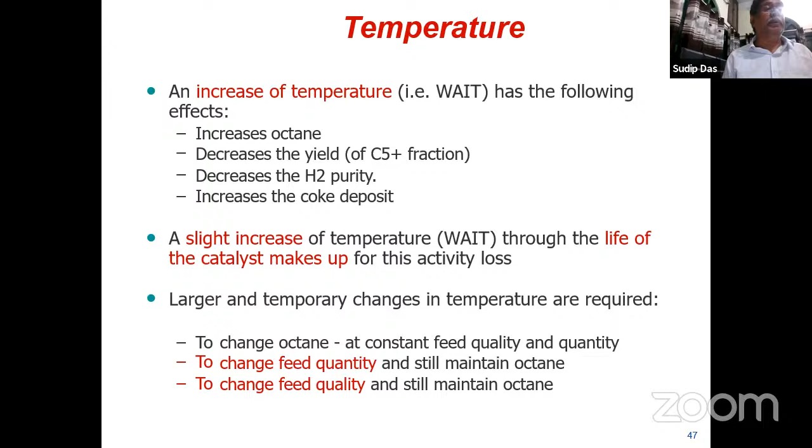Larger and temporary changes in temperature are required to change octane at constant feed quality and quantity, to change feed quantity while keeping octane number constant in the product, or to change feed quality while still maintaining the octane number.

Space velocity can be calculated as weight hourly space velocity, that is weight of the feed per hour over weight of the catalyst in the reactor, or liquid hourly space velocity, that is the volume of feed at 15 degrees centigrade per hour over volume of catalyst in the reactor. It is linked with the residence time of the feed in the reactor and affects the kinetics of the reforming reaction. If space velocity decreases, residence time should increase.

The basic recommendation is to always decrease the reactor inlet temperature first and then decrease the feed flow rate afterwards. Conversely, always increase the feed flow rate first and increase the reactor temperature afterwards. These two conditions must always be remembered by the operator.

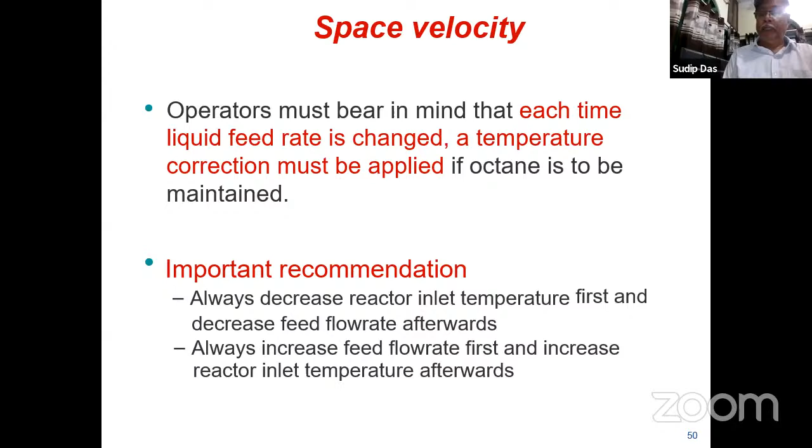Now, hydrogen to hydrocarbon feed ratio: pure hydrogen moles per hour recycled divided by naphtha flow rate moles per hour. The recycled gas molecular weight is obtained by chromatographic analysis, as well as hydrogen volume fraction in the recycled gas. The feed molecular weight is obtained by chromatographic analysis or by correlating from the distillation range and specific gravity. This is a method of operating condition.

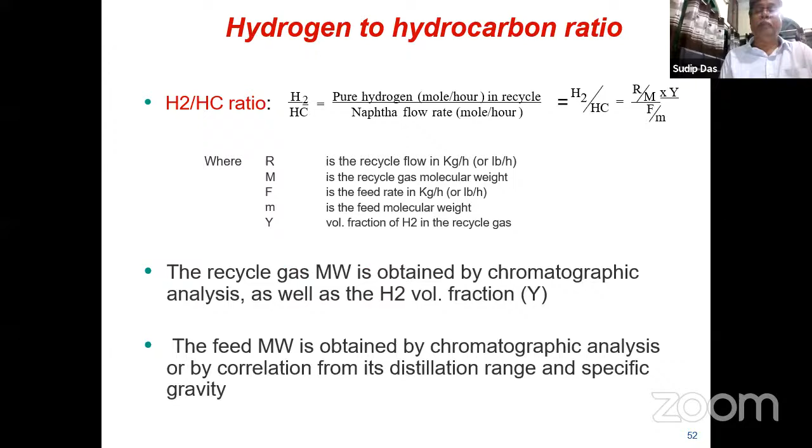To change this, the operator can adjust the hydrogen to hydrocarbon ratio by lowering or increasing the recycle compressor flow. For a given unit, the amount of recycle is limited by the recycle compressor characteristics, that is power, suction flow, etc. Hydrogen to hydrocarbon ratio has no obvious impact on product yield or quality, but a high hydrogen to hydrocarbon ratio reduces coke buildup. It is strictly recommended to operate with a hydrogen to hydrocarbon ratio equal to or higher than the design parameter.

Next is feed quality, the characteristic of the feed. Feed is characterized by 0.85 N plus A. With a higher 0.85 N, naphthenes plus aromatics, the same octane can be obtained at lower severity and product yield will be higher, or at the same severity, the octane number will be higher.

Higher naphthene content means the endothermic reaction heat load increases, and the feed flow rate will be limited by the heater design. With lower 0.85 N plus A content, meaning higher paraffin content, the hydrogen purity of the recycled gas decreases, and the operation will be limited by recycle compressor capacity. If impurities are present, there is a temporary or permanent reduction of catalyst activity by poisons contained in the feed. So the feed characteristics are really limiting.

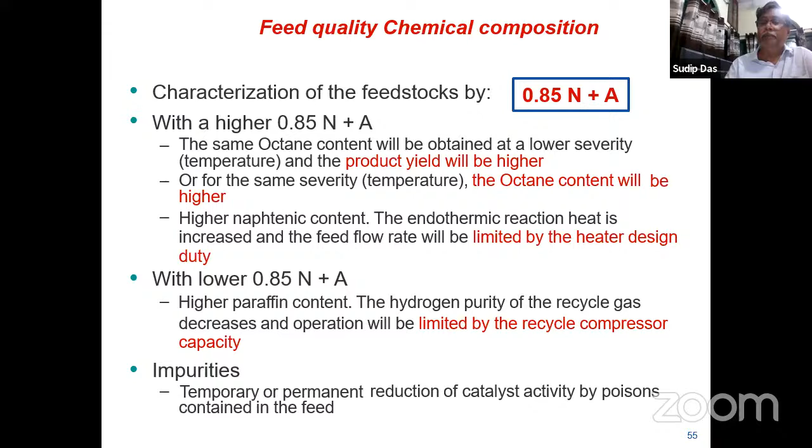Feed is in the gasoline range, and product is also in the gasoline range. The only difference between feed and product is that the feed has lower octane number and the product has higher octane number. So the feed distillation range follows 70 to 100 degrees centigrade initial boiling point, with an endpoint of 150 to 180 degrees centigrade.

Cyclization of lighter fractions like C6 is more difficult than C7 to C8. So the lighter the feed, the higher the required severity for a given octane number. So a lighter feed is not desirable, and for lighter feed, cracking is also possible at a particular reaction temperature.

For heavier fractions with more naphthene and aromatic content, lower severity is needed to obtain good yield, but again polycyclic compound formation occurs, which favors coke deposition. So an endpoint higher than 180 degrees is not generally recommended for operations. An initial boiling point of 70 and final boiling point of 180 is the recommended feed range, or slightly above, up to 204 degrees centigrade, can be accommodated.

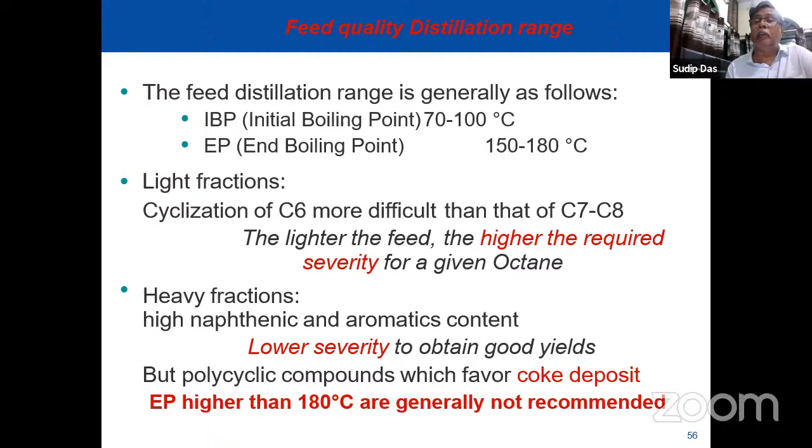These are the operating parameters in summary. If we increase the pressure, octane number decreases, reformate yield will decrease, coke deposition will decrease. Increase of temperature, octane number will increase, reformate yield will decrease, coke deposition will increase.

Space velocity: increase of space velocity, octane number decreases, reformate yield increases, coke deposition will decrease. Hydrogen to hydrocarbon ratio, if we increase, RON will not be affected, reformate yield will not be affected, but coke deposition will decrease.

Again, naphtha quality, the feed quality: A plus 0.85N increases, RON increases, reformate yield increases, coke deposition decreases. End boiling point increases, RON increases, reformate yield increases, coke deposition also increases. Initial boiling point, if increased, RON increases, reformate yield increases, but coke deposition decreases. This is a nutshell of the operating variables in the reforming unit.

Now the catalyst. The main characteristics of a catalyst, other than the physical and mechanical property, are its activity, its selectivity, and its stability. Activity is the catalyst's ability to increase the rate of the desired reaction and inhibit the undesirable one. Its activity is generally measured in terms of temperature.

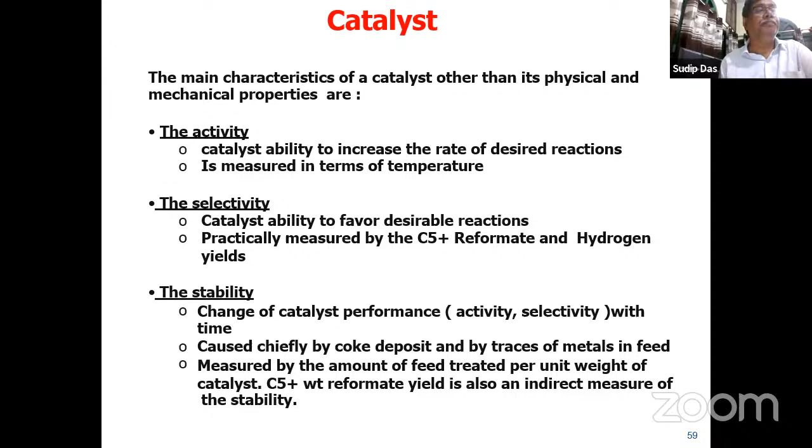The catalyst generally used is chlorinated gamma alumina with nanoparticles of platinum. Chlorinated gamma alumina provides strong acid sites, and platinum promotes the metallic sites, which promote the hydrogenolysis of the reaction.

Stability of the platinum has been improved by addition of promoters like Re and Ir. The hydrogenolysis of platinum has been reduced by addition of promoter. The acidity of the chlorinated gamma alumina has been tuned by addition of promoter also.

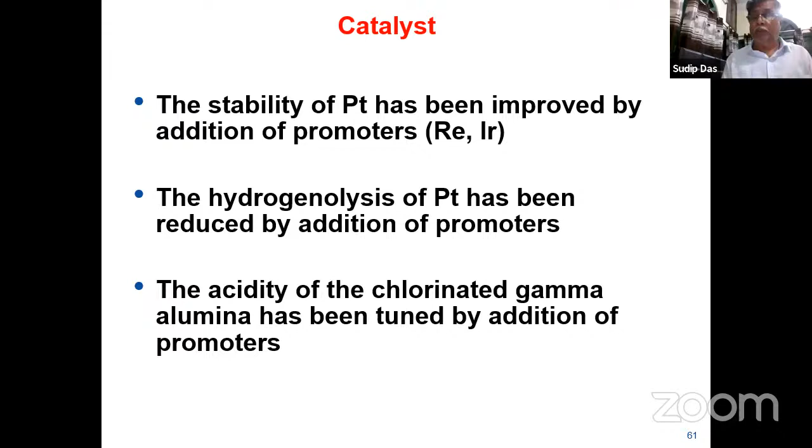To improve the catalyst stability, platinum sintering has to be hindered, by addition of promoters such as rhenium or iridium. In addition, Re and Ir are alloyed with platinum. The boiling point of platinum increases, so the sintering possibility is reduced.

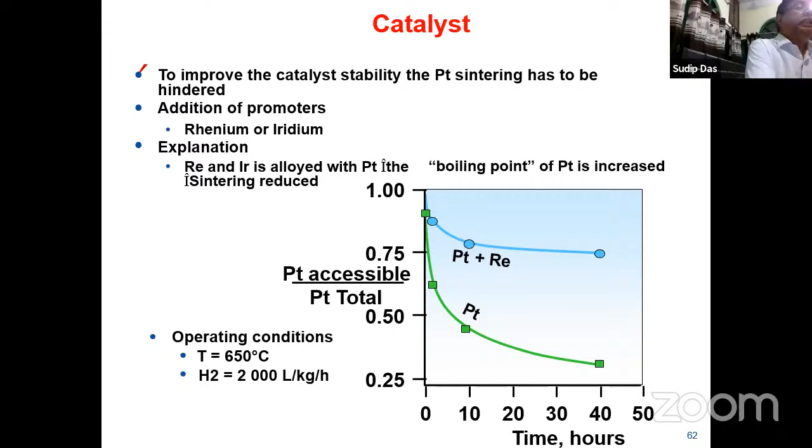So the reforming catalyst, or bimetallic catalyst, consists of platinum plus promoter on an alumina substrate. Rhenium and tin are among the essential promoters, besides others. The main feature of the catalyst is high purity alumina support, which gives high mechanical strength.

Platinum associated with rhenium gives high stability and selectivity. Platinum associated with tin gives high selectivity. Another important parameter is that this catalyst has regenerability. The combination of these qualities gives the following advantages: high reformate yield, high hydrogen yield, high on-stream factors, and low catalyst inventory.

Now stability. Normal cause of catalyst aging or deactivation is metal sintering, which depends on temperature, metallic phase, and presence of chloride. Also, deposit of coke on metal and acid sites; the coke effect can be split into: degree of poisoning of deposited coke, and relative coke rate, which is more important.

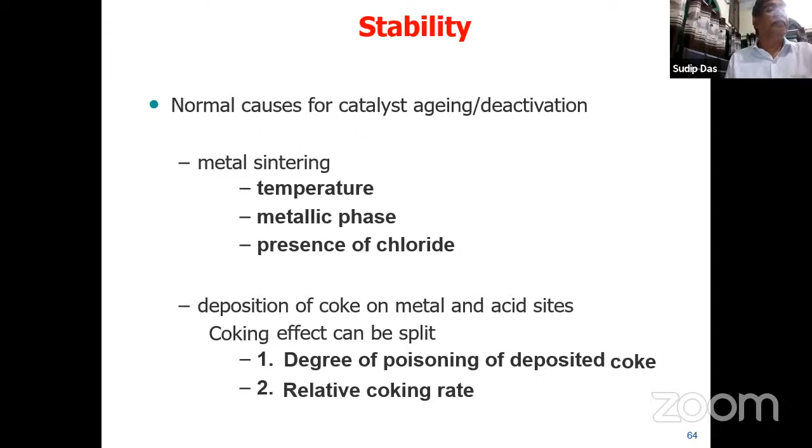Selectivity: desired yield is hydrogen, C5 plus reformate, and low benzene. Benzene yield can be minimized by pre-fractionation of the precursors, which is present in the boiling range between 70 to 85 degrees centigrade.

Benzene is also produced during the reaction by hydrodealkylation of alkyl benzene type materials, or alkyl side chain naphthalene type of material.

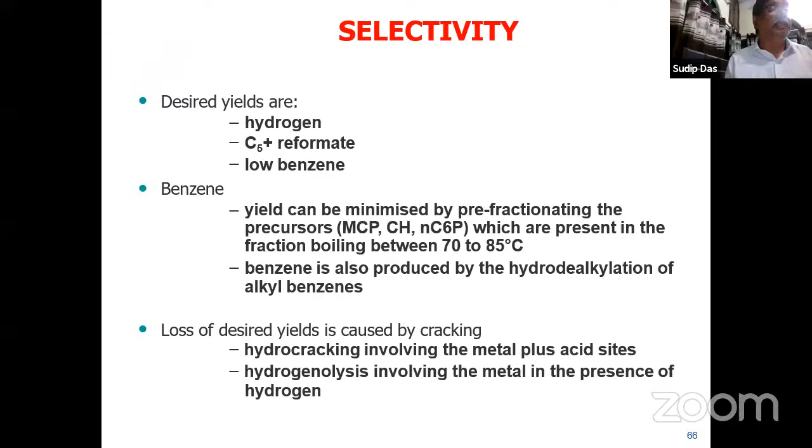The loss of desired yield is by cracking. Hydrocracking involves metal plus acid sites. Hydrogenolysis involves the metal in presence of hydrogen. This is the loss of desired product due to cracking reaction.

As earlier told, the catalyst affects the reaction rate through two different types of sites: one is the metallic function or metallic sites, and the other is the acidic function or acidic sites. Different types of reactions are promoted by these: dehydrogenation is promoted by the metallic sites. Dehydrocyclization is promoted by metallic plus acidic sites. Isomerization is promoted by metallic and acidic sites. Hydrogenolysis is promoted by metallic sites, and hydrocracking is promoted by metallic and acidic sites.

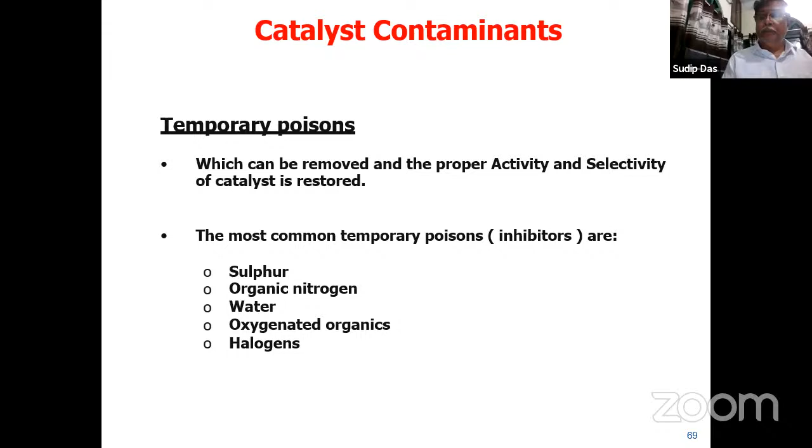Temporary poisoning can be removed with proper activity and selectivity of the catalyst, restoring activity. The common temporary poisons are sulfur, organic nitrogen, water, oxygenated organics, and halogens. These should be removed before the feed enters the reactor. The main permanent poisons are arsenic, lead, copper, iron, nickel, chromium, mercury, sodium, and potassium.

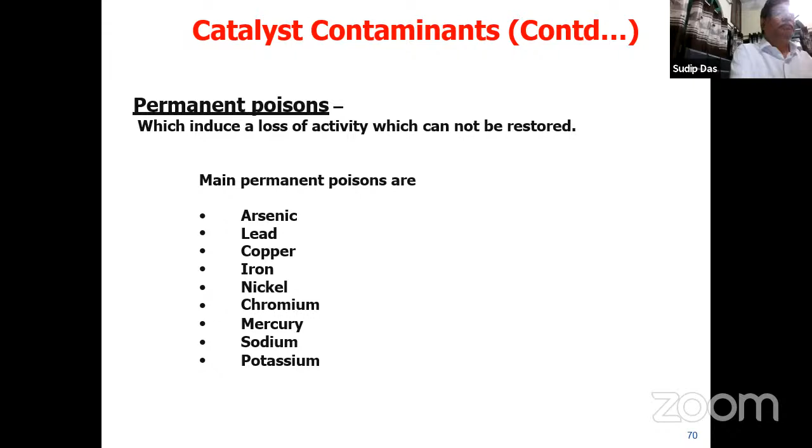At a number of places one has to measure the temperature of the reactor by introducing probes; permanent probes should be there in the reactor bed. Another type is the radial fixed bed reactor, which is the modern design used in most reactors. The upper part of the reactor is designed to account for density change, settling, possibility of catalyst bypass, and space for mechanical assembly. Catalyst dead space is also provided now, which was not there previously.

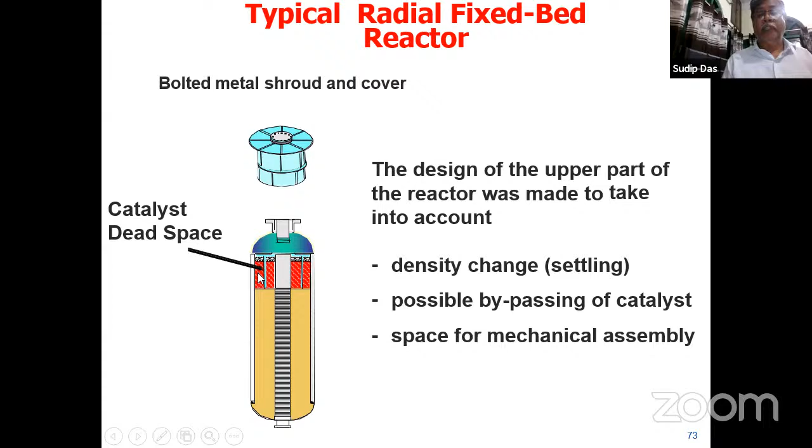So we discussed what is reforming, what is the potential use of reforming, what is the reaction, what are the operating variables of the process, and what type of reactor is generally used. It may be a batch, semi-batch, or continuous process in reforming, with continuous regeneration of the catalyst taking place. We also discussed the types of reactors used in reforming units. The reforming unit is mainly used for value-added products in a refinery, for the profitability of the unit. The main point is that the boiling range of feed and product remains more or less constant.

Only the composition changes during the reaction: straight chain compounds are converted to isomers, and naphthenes are converted to aromatics to increase the octane number of the product. When there is a large number of straight chain compounds, it is better not to go for this type of reforming but to go straight for the ethylene production unit, which is more economical, because converting straight chain compounds to aromatic compounds is difficult. If the naphthene content is higher, with 0.85 N plus A, then one should go for the reforming unit to increase the aromatic compound.